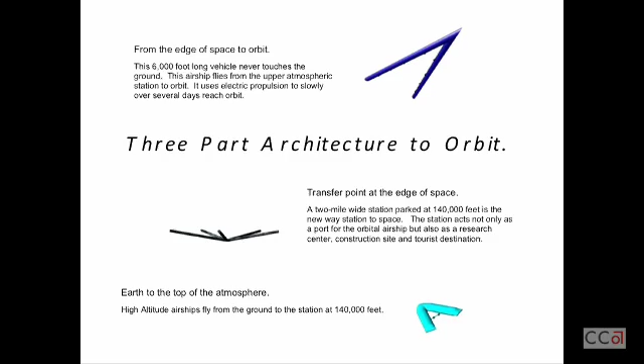When we first started this, we identified about 11 completely impossible things about why this won't work. That didn't bother us, because 35 years ago we didn't know any better. There's only about 3 impossible things left. Now that we know better, those last 3 don't really bother us so much, because we got around the others. We think we can get around the next 3.

Now this is the video that I think doesn't work. This is how I get you to space, but I can't program a VCR. Yep, that one won't work.

But this isn't just an imagined thing. It's not just conception drawings. These are things we've actually been building and flying at nearly 200 test flights, again, for about 35 years.

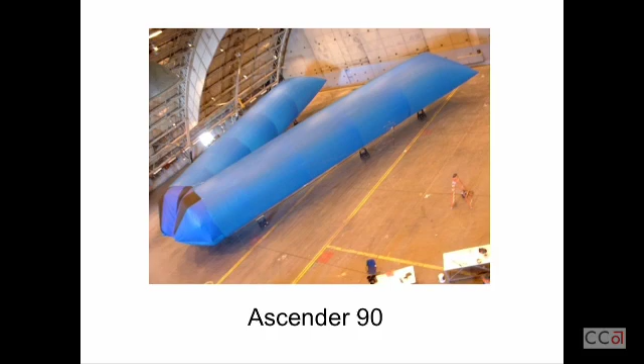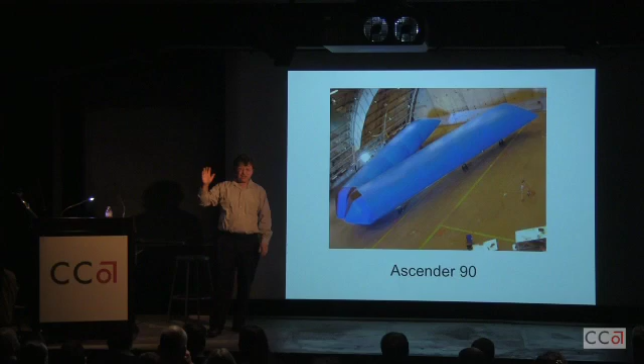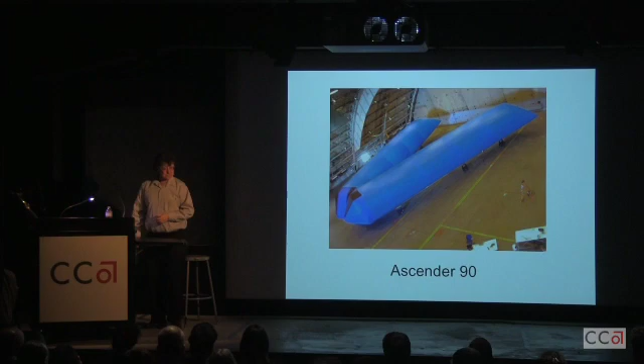Everyone's heard of those V-shaped UFOs that people see. You know, they report all kinds of UFOs. There's actually 4 separate websites devoted to JP Aerospace convinced we're aliens. A few times our vehicles have been spotted, blurry pictures taken by hunters, and it makes it into the papers. Those V-shaped aliens? I kid you not, it's all us. We'll send in pictures of us in the hangar, standing next to it, going, hi, trying not to look like aliens. The papers won't print it. The alien story is a better story. But actually that's okay, because I do a lot of alien talk radio, and they buy more hats and t-shirts than any of the space people do. Essentially, they're a little not quite all there, but they're really nice people.

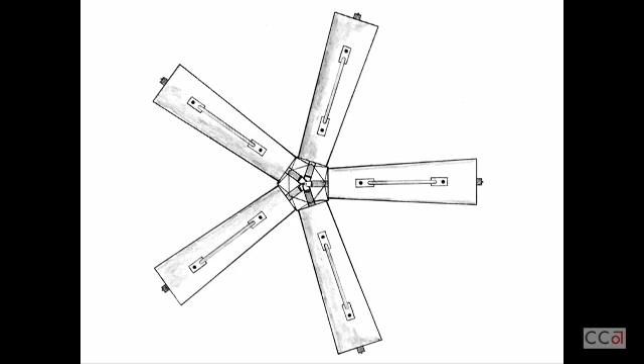This is kind of a view of the big Endgame. This is a 2-mile-across vehicle. Now, that may sound gigantic, but really inflated structures, you can do a lot more with size. It's not like a bridge where it's a very complex, difficult thing. Most of this is hollow and inflated like a hot air balloon.

To get that to work, for the folks more technical, you have to basically eliminate the drag. So we have forward drag reduction systems, kind of an advanced concept. And then you have hybrid electrochemical engines in the back that actually produce electricity while they're thrusting out. These are all very exotic technologies, but they're all technologies that we've actually done. We've actually fired our engines - we're on our 82nd test firing of them, and we're doing our next flight firing of them at 100,000 feet this summer.

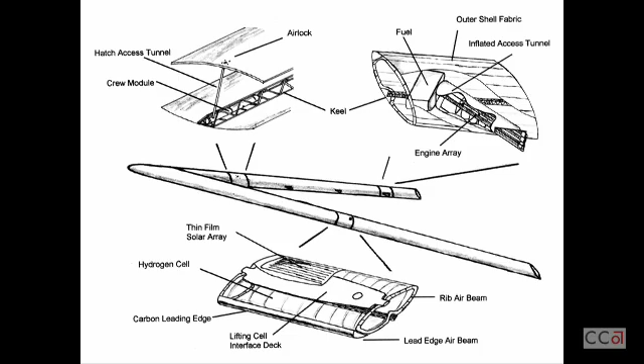Is this Air Force funded, or how is this funded? Actually, I get that at the end. We're all privately funded. We did sell one to the Air Force, and we paid the rent for 2 years with that, which is great. But we actually don't do that very often.

So was this one carbon fiber? Yeah, all the poles are carbon fiber. The small poles we buy, the large ones we do all our own molding. And then there's these aluminum tab connectors. So you'll see in a lot of our other vehicles, they're all made out of carbon poles, because this gets torn apart when we're done flying the airship, and then it gets made into a dozen other smaller vehicles, and those get torn apart and get made into an airship again. They're kind of our tinker toys.

So for the flights coming up in April, a lot of the equipment is flown 24 times on two dozen different vehicles in different ways as we just build up new things. And because we're not a big funded program, after each flight, everything's got to get torn down because all the parts get built up into the next flying contraption.

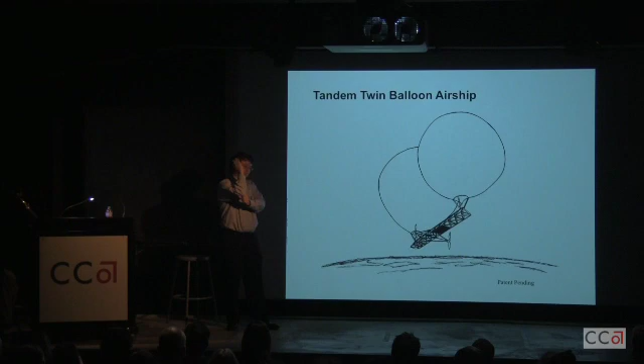Because we have this, the tandem, you get a feel for how big it is. See the propellers there and the balloon holding it up. Again, it's kind of two balloons on a stick. But it actually did the same thing as the big, giant, 300-foot long thing that looks like a Goodyear blimp does. Carries the same payload, flies a little faster, but it's so cheap it's almost disposable.

These balloons start out about 14 feet across, but they get to about 60 feet across. So at altitude, the balloon will be contacting from here to here. And the way this works is, as it's going up, the air flows around the balloons, creates a low pressure zone underneath. You get the distance right, the low pressure zones combine, and it locks the balloon in place. You ever seen, at Sears, they put the beach ball in front of a vacuum cleaner, and the beach ball would kind of stay right in place there? It's the exact same thing on a giant scale.

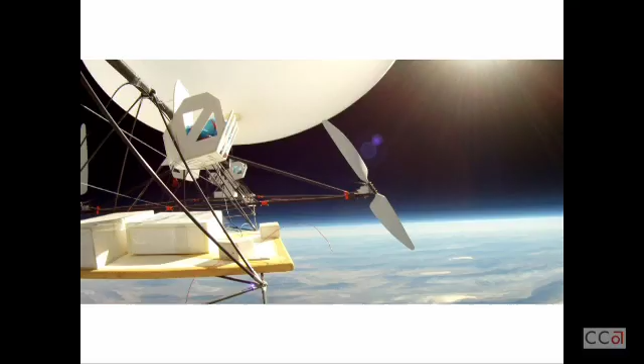And that's a view from up top. That's sitting at 95,000 feet. See, the balloon's gotten pretty big there.

And we set the world altitude record for airships with this one. The previous one was from the Army program. They only spent $100 million on theirs, and they flew about 6 miles lower than this. They got to that altitude, and their balloon ruptured, and they lost the entire vehicle. They don't know what happened to it - it just vanished, it was gone. We actually got ours back in the shop. We've taken it apart, and it's going into the new Ascender 90 vehicle.

And that's a view looking up the truss of the balloon. You see the high altitude propellers, the whole truss structure, video antenna. These are our parachute baskets.

At the peak altitude, when we're all done with the mission - we flew up, did some turns, got everything good - then we released the balloons. Actually, one balloon got up to peak altitude, and we pushed it higher and higher, and it finally popped, so we released the back balloon.

And then the parachutes - these are like kid baskets in front of their tricycles. When you're in a vacuum up there, if you put out the parachute too soon, it just falls and tangles up with stuff. You put it out too late, you fall supersonically, and it just rips off.

The mission control guys - we have an old converted news van that operates our mission control. Some guys are really good at it. They'll be looking at the pressure, looking at the data, looking at the descent rate to put that parachute out right at the right time. A moment late, it tears off. A moment too soon, it just falls and tangles.

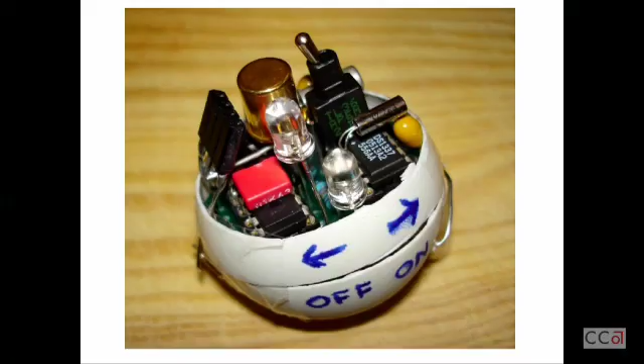This is one from Sweden. There's 2 computers, a data logger, and 17 onboard experiments. It's a full atmospheric lab. And this is a real ping pong ball. About 1 in 5 are like this, very sophisticated, doing a lot of real science.

Sometimes they put just a marshmallow. That's actually my favorite. You put a mini marshmallow in, say you're in kindergarten, it puffs up in the vacuum and freeze dries. And it's a great science fair experiment.

I had a bunch of 5-year-olds, 6-year-olds, first graders. And they were local, so I took the ping pong balls back, and they flew all gummy bears. The teacher made them do hypotheses and get back what they did with the gummy bears. But I thought, well, it's more of an inspiration thing. You get to see the video of the curve of the earth and the ping pong ball. But it's not really science in flying gummy bears. Well, they taught me a lesson that day.

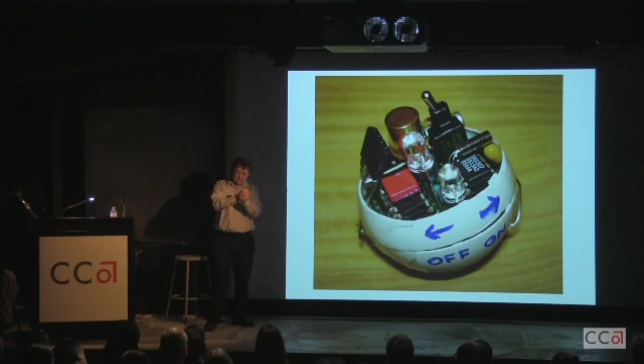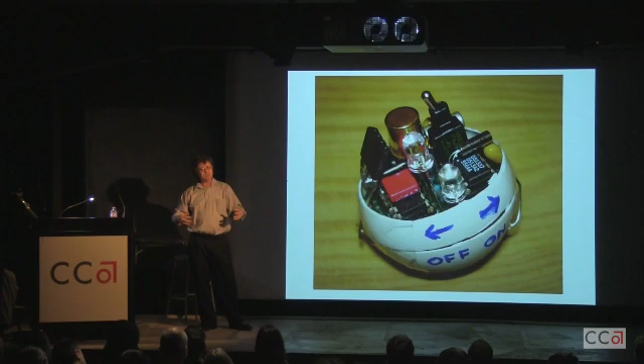A girl in the back raised her hand and says, why is my gummy bear rough? And I told her, well, it's outgassing. When you're in vacuum, particles of trapped gas make their way out. And we ended up having a 45-minute discussion about outgassing, a pretty sophisticated phenomenon with 6-year-olds. And they all got it. I know engineers who work for me that don't have that gut intuitive notion of that phenomenon as all these 6-year-olds have.

Then a cool thing happened about 3 years ago. Oh, there's some PongSats. One of the guys got a thermometer, drilled a hole in it, and put the thermometer through the ping pong ball. So it didn't quite fit in the ping pong ball, but we flew it anyway.

I made a comment on our blog that I love the ping pong balls with racing stripes on. And an amazing thing happened. They all come now with this gorgeous artwork all over the ping pong balls. You get smiley faces, aliens. Had one last year with the entire Harry Potter scene painted out with all the new characters. It's just amazing. There's a smiley face PongSat, but now they all come like this. They're doing science and they're doing art all at the same time.

We don't charge anything for the ping pong balls because we just fly them on research missions. We started flying, our first one we flew 13. I thought, wow, that's a lot of student experiments. That's more than NASA does in 5 years of student experiments. Now we do 1,000 at a time. We're just about to break 10,000 this April, and that's more student experiments flown than all the space programs in the entire world combined ever.

There's some more. This one's from England. He put his little astronaut guy inside. We thought, no, so we got to put him outside just to get the shot.

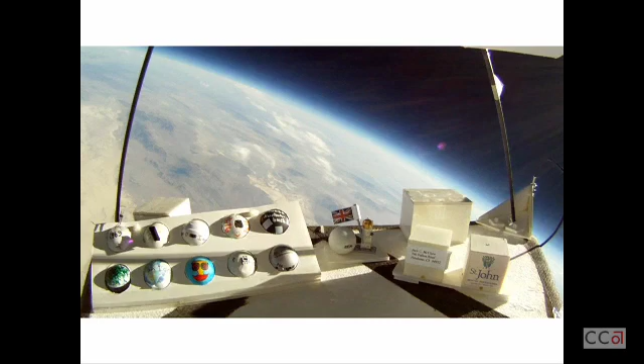We did about 2,000 PongSats from Japan after the tsunami. And they all flew. It was all from the Fukushima area, from the emergency shelters. They built the PongSats and sent them to us, and they all put messages of hope. It was kind of sad because they had messages to their lost loved ones that they flew. After they landed, they get them all back after the mission with a DVD showing the onboard video, data sheets, how high, how fast, and the certificate that they flew.

And they actually planted this big orchard, or field around the city there with the sunflowers that had flown. This is a sunflower that flew, from a seed that had flown on one of the PongSat missions. And that's what we want to happen to our millions of PongSats.

Every time I'm reading the book of John, I think, either he read my mind or I read his, it's kind of mixed up, but it's an endless source of inspiration for me, as it is for many others around. I have to talk only 10 or 15 minutes, that was a big trick, but we'll go through it. I'll try to establish a conversation with some of the things John was doing in this project.

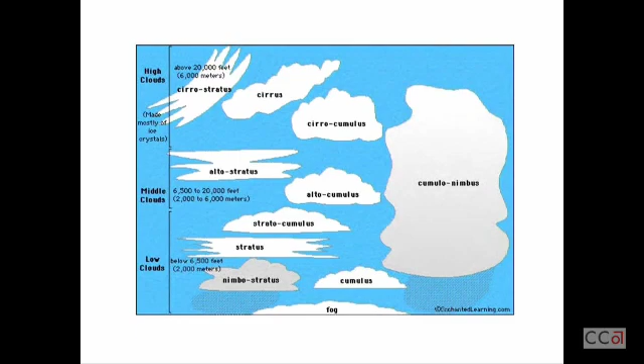Now I'm doing a residency at MIT, working with somebody who is doing this kind of cloud chamber - not exactly, but they build a chamber where they put fluids to understand how the atmosphere relates to experiments on the ground, studying what happens with currents up there. And I asked, out of curiosity, what if it happened - what if a future city were like clouds, and each of them were...

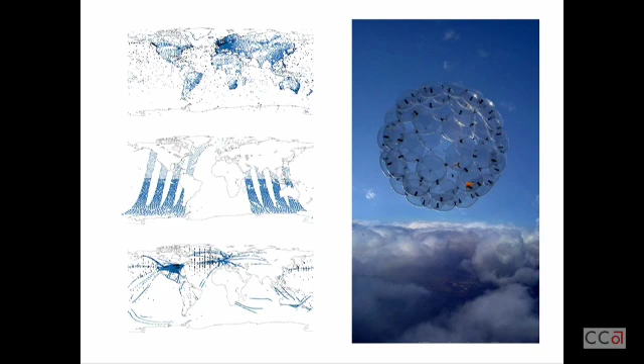Let me show some of the images. Let me show something like this, no? Each of these - this is a collage, this isn't real, I'll explain the distinction between when something is real or not - but you know, what shape might a future flying city get, which might be like an aggregation where each of these spheres you can think of as a house, and they combine with each other. But if you don't have a net to hold each of these spheres together, what shape might future flying cloud cities get?

It might resemble what we see today as the clouds. We started to do a kind of small experiment with a big tank which spins all the time, kind of like the rotation of the Earth, and then we put some liquid in, like a chemistry department, with a neutral buoyancy particle. But they were running only 1 or 2 particles. I said, what about if you put like 1,000 of these particles in? She got interested to understand how the shape of this agglomeration of a future cloud city might resemble, which got me enthusiastic about this idea.

There are a few things I'll go back and forth on. Some will be more technical, some not, I'll explain later. But many of the things, when we look at it, it's this kind of basic modular construction, an aggregation of things, and it's very simple to build. This is what I think, so I share pretty much with John, it's like hands-on, try to do the things.

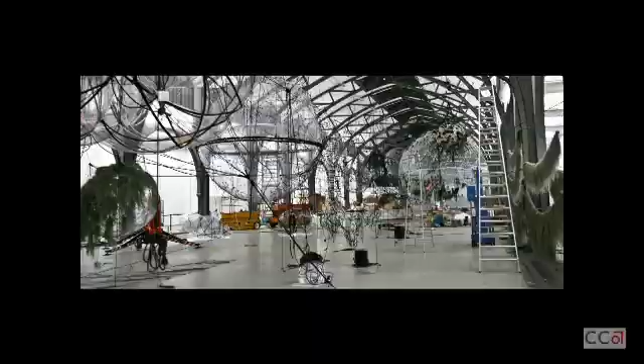This is what we worked on at Berkeley with Elizabeth Thomas, I'm here, and this was part of the things. Many of the plants inside are from the family Bromeliaceae, like Tillandsia, which are plants that live completely from the air. This means they're a good candidate for future flying gardens. It's the same family as the ananas.

This is another thing which I think would be interesting for John. It's a kind of foil, a Japanese foil produced by Toray, which is getting complicated to produce in a bigger sheet, but so far I think it's the better foil for keeping a balloon, much better than Mylar. You can step on one of these balloons, 2 persons, it will not pop. It's free of wrinkles and will last very long.

This means one of the things I said with John: why don't we try to send this balloon up there and see how they might react. And then, with some of these spheres, we can start to send gardens and hopefully in the future people there too.

Let me put it this way, this was back to a collage from 2001 when I was a student at the Städelschule. All the time when I moved from Argentina to Berlin, something I was missing was the bad weather, the cloudy days. I think I shared this when I was in St. Petersburg. Usually in Argentina, when the plane is landing, people used to clap because it was successful. But in St. Petersburg I was there for 3 weeks and there was no sign of sun, just cloudy.

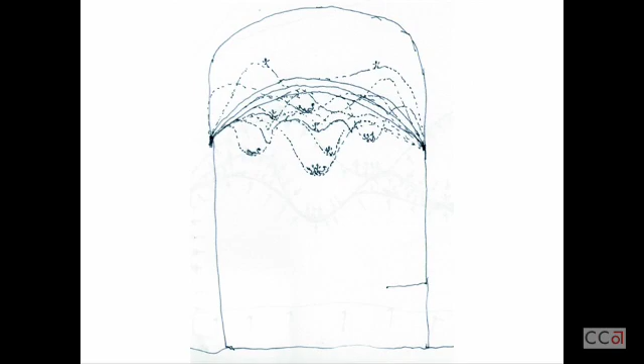For me, it's pretty much like a science fiction movie, because when there's a lot of pressure, all three foils are together. Does it mean there's no space? No, all three are together. Then you enter with your body, and you push the foil down there, and then you open the space. While you move into the space, it follows you. It's pretty economic somehow.

There's this drawing by Paul Davies of how this kind of parallel universe might form, which is more cosmological. I was with Alan Guth at MIT also, talking a little bit. And the other thing is that's a model I did also in 2001.

Nobody will believe that this will be possible. And then when I see this picture, I say, well, that's something which made me happy somehow to see still. And let me get, well, it's just regular PVC, yeah.

The material is not so special, but what we did a lot is tests - stretching, how many people, and here and there. And the other thing is, we'll show you some slides later, but we wanted to make it fly. This means filling up one of the chambers with hydrogen, and turning it into a kind of floating island. The other thing is, very simply, the theory of Einstein's relativity - depending on the mass of the body, it might bend space and time.

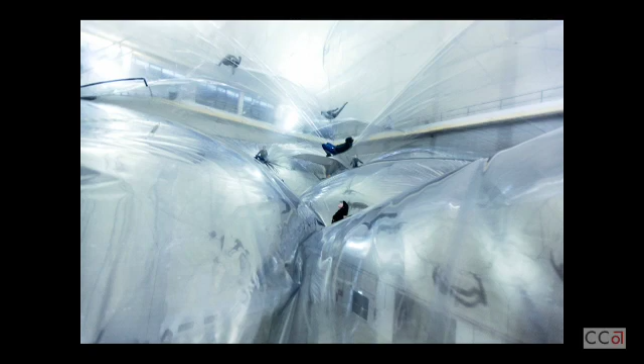And this is what really pretty much happened. When 3 or 4 people are at the same point, it gets very, very difficult to escape from it because you bend it really, really much, and that's why the instructions are getting up there. People say don't get together so close to each other, because you might not escape this kind of black social hole. Something like this.

But what I like is, yeah, well, there are many, it's sometimes getting very, very wild. It's also pretty much unpredictable because sometimes the pressure is pretty high. Does it mean it gets much more stable the way how you move?

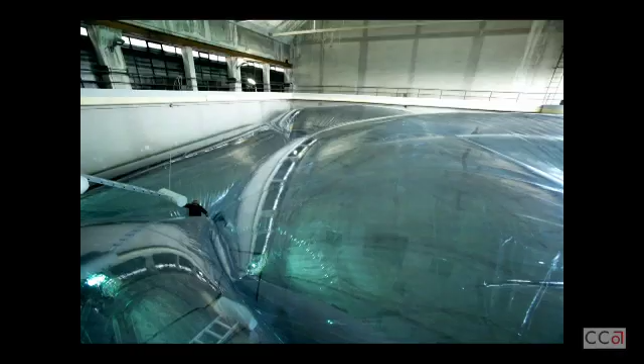Here you don't see so much the people down, but don't forget you're like 60 meters high, depending on the pressure that you have at each level. Here you get down. Here people from down, here from the top. For example, this guy is getting in trouble trying to go out - you see, he cannot escape. We were struggling a lot because he had to wait for 2 or 3 people to go to the back of the room, and then he can get high enough and get out. It's a little bit complicated.

It's like going back to the idea John was talking about, this 3-stage architecture. There's one thing, very simple: you have a normal helium balloon, not with Mylar, and you put it underwater, it gets small, you release it and it grows, as John was showing.

Now there's one thing in an airship called the ballonet. You don't want to lose helium, so when you go up and down, it will be a kind of architecture or space which depends on the level where the airship is. You have all the time this chamber that shrinks, gets small, then gets big, depending on the altitude.

If you think of this ballonet inside an airship, naturally you might have an auditorium or a place to walk that's very stiff because the pressure is very high, to something completely low. It means it's something depending on the altitude where you're standing. The space might also change based on that.

This was at the beginning. We were always afraid that this would close up on top of you and you wouldn't be able to breathe, but at the end it worked.

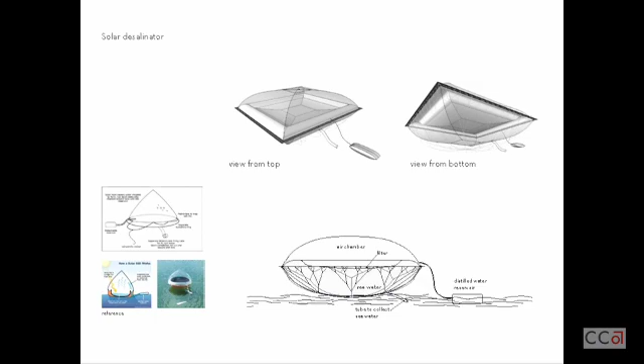At MIT we started speculating - there's this solar desalinator that sailing boats usually have, and the same piece was built with the idea that later we might put it outside. We thought it would be interesting to make a video performance on the Maldives island - they said in 15, 20 years it will disappear - and we started building the same dimension, the same piece that's in Italy, just changing the context. You can widen a little the relationship it could establish, but you can drink water, desalinize the water, and so forth.

Yeah, these are just like with some friends.

Maybe, for 10 or 12 years I wasn't really invited into architectural school - I was much more into the art scene, let's say, and still today. But I don't know what happened - suddenly now the architects are getting interesting. I don't know what happened, but anyway, it's interesting.

One of the things is you can think of these spheres I'm trying to build as a 3-dimensional wheel of a bicycle. The hub in the middle is the one where all the tensors get to. The spaces are getting close also in between them, and depending on the tension you put on all the spokes, which go 360 degrees, you get a very rigid structure.

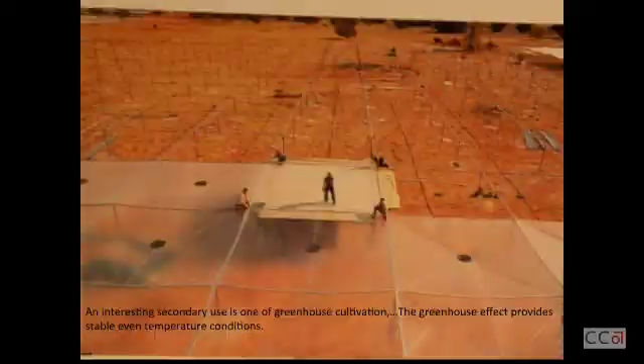The other way is how you can also collect water. This is a barrel they use in the desert of Atacama, and in 12 days they collect 200 liters of water just through the change of condensation, and it's in the middle of the desert. This means the upper part could also be interesting, to have a kind of sail where you could fish water from the clouds and bring it down. Something maybe John and I can start to work out.

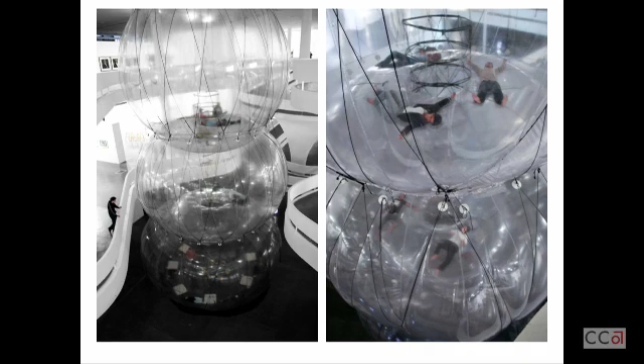This is a little bit more complicated. It's always these pressurized spaces. You can imagine when somebody forgets the door open down, you could hear from the shore, close the door, because everything collapses, right? It's like that, and getting squeezed there is a little bit more complicated.

But I thought I would have it, the solar thing I wanted to show you, that I left there. Anyway, we will go back. I put the images together, but part of this is a thing which was at the Met.

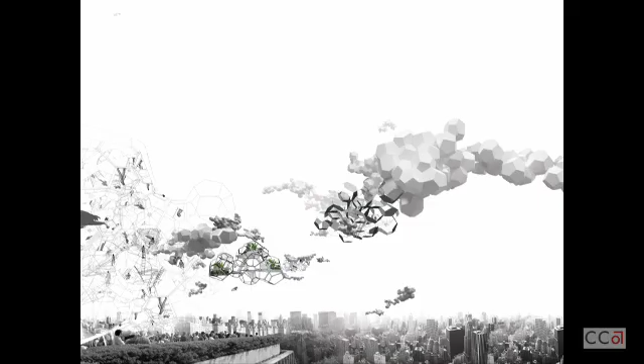This is called the Weaire-Phelan geometry. Maybe something interesting also for John, because there are these two physicists from Dublin who have written 'The Pursuit of Perfect Packing.' I thought this is a great thing. This is kind of the Weaire-Phelan geometry, which somehow is the maximum volume and the least surface of how to put spheres together in a kind of limited space.

Does it mean the densest? It could get a little bit more, it's the more efficient, you know, based on, and there is nobody who can still beat this relationship.

What is very important, when you use lighter-than-air vehicles, which is what John and I are doing, the difference from heavier-than-air vehicles: lighter-than-air is a vehicle which flies with a gas that is lighter than air, somehow. I don't know if it's too technical, John, if we'll be able to follow, or should I insist on some points, but otherwise just tell me if something is getting wrong.

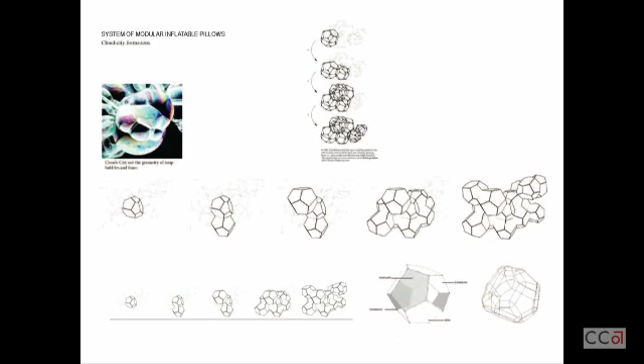But anyway, I've been building this kind of configuration, because it's very important to have a lot of volume and little surface, and the sphere is the best relationship we can give. Now, when you start to put many spheres together, let's say each of these spheres is 1,000 feet or 300 meters, how can they aggregate to each other, and how, from a single individual house or a city, they can be combined to each other.

And then also if Don Pettit, one of my favorite astronauts on top of the International Space Station, might be seeing the reflection, and at what time the orbit might coincide, that we might be able to see him, and he sees us and we see him through the reflection of the thing. And then we started to work here. We wrote to Don Pettit, but we didn't get an answer yet. I think he got down.

Yeah, I mean, and then again, it's like the position of the mirror kind of starts to respond to different kinds of sensibility.

I like also, you see this, and you see again the Bolivia image, the Uyuni, trying to put the skies down where it happens sometimes. That is some of the images where Central Park is up, and there's more a capability of trying to perceive many images at the same time, and how through this kind of new environment you are able or capable to move through these.

And the other thing is, I'm kind of forcing myself to talk more about architecture, but I don't know if you want this.

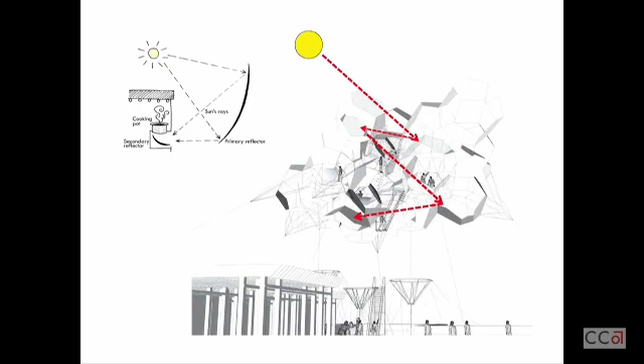If you have a huge city down there, it might always be under the shadow. With a laser, we're playing with how the sun might reach the lower part. Here we're cooking a chicken in a solar balloon, so you can do this kind of solar cooking.

To go back to the idea of a solar balloon, this is a bit different from what John was doing. He was using hydrogen and helium to lift things up. There's another way where you can fly only with solar energy, where the balloon goes up only with the temperature difference produced by the sun.

Funny enough, when I was at NASA Ames with all these guys who put people on the moon, I said, look, for $300, 2 people, a weekend, you can put a man into the air. And I could not believe it. It's like there's this trade of technology somehow.

There's something very, very simple. This type of balloon that can put a man in the air is just a regular polyethylene plastic bag, taped with scotch tape and nothing else, with a small bike ring. I think there are only 7 or 8 of these ever built since we've been on planet Earth that can lift a man in the air. They're very little, and it's a very small community.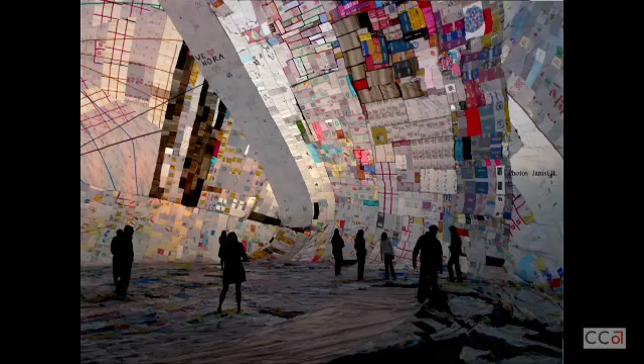Then came this project, a little bit like John's Pong set, but what we tried to do - I think it's in Colombia - Hugo Santamaria called it and named it Museo Aerosolar. This means a kind of flying museum, which you can get inside, and it flies too, with the sun only. There's nothing, no hydrogen, no helium.

You have to fly very early in the morning. There's no real scale to it, and that's something I'd love to explore - how to slow down the scale. This is a perfect example of how I'd love to build a flying city, crowdsourcing it: people donate plastic bags, they come for the week and tape it together, they see it flying. It's reusing material with so many properties, which for me is unbelievable.

Many people started doing it by themselves - there's a group in Helsinki who saw the instructions and started on their own, another group in Cuba, another in Germany, and everyone starts doing it their own way. Sometimes we meet each other and tape it together, and it keeps growing. I'm always thinking about how we can scale this down to build something together - like, being in Silicon Valley, how do we turn from cloud computing to cloud citizenship, and try to close that gap.

If we learn so much also on the way - I don't want to get too much into politics, but my family was forced to live outside Argentina during the military dictatorship for 11 years. They were allowed to come back when I was 11. I got married to a Serbian, my wife, and then she could not be in Europe. There's a lot of things going on, beside also how badly the distribution of land, with limited resources, has been done with a certain mindset.

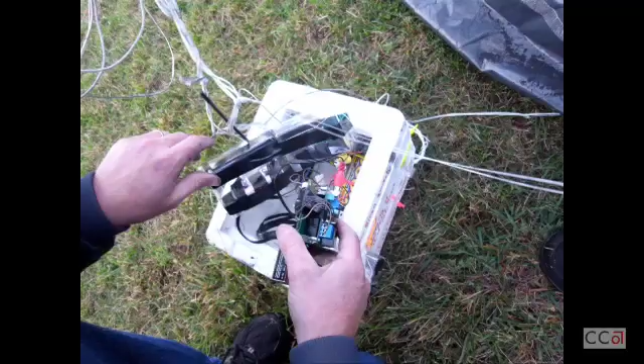Well, here we are trying to bring down the balloon. This is something I'm looking to start doing with John. I don't know if I will go through this project, but very quickly, there was a proposal for a competition.

This was an architecture competition, 2000 or 1999, to build a mobile clinic to prevent HIV in Africa. My father worked for the World Bank for many years, and for holidays I would visit him in Cabo Verde, Colombia, or Guatemala. What always happened was a kind of lack of knowledge about what's going on there - you can imagine the European Union arriving, and for the people it's a taboo. They don't even talk about sex.

But anyway, the commission comes, they meet up in the square, and people run off because they don't even talk about sex, and you're going to teach them how to put on a condom - it's an unbelievable thing. So I said, why don't we do a flying condom?

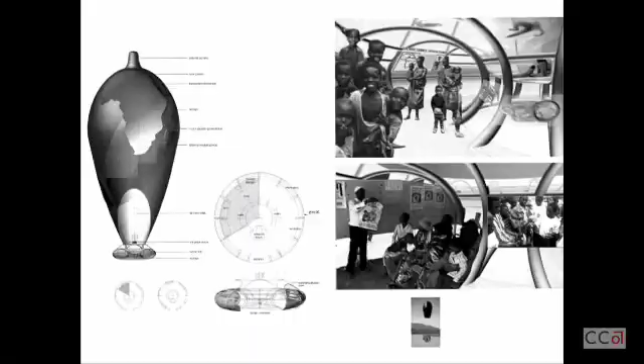Very simple - imagine people in a small truck saying, today we'll talk about prevention, and nobody comes to the square, nobody wants to talk. But imagine this huge flying condom coming from the air, reaching the village - everybody says, what the hell is this? And they come to the square where they start to talk. You already generate a kind of synergy which somehow lets you start talking about something else, and then, by the way, you can talk about prevention.

I think the first collage I was doing also used part of Ant Farm's work. Curtis isn't here, I didn't manage to send it to him, but they're fantastic.

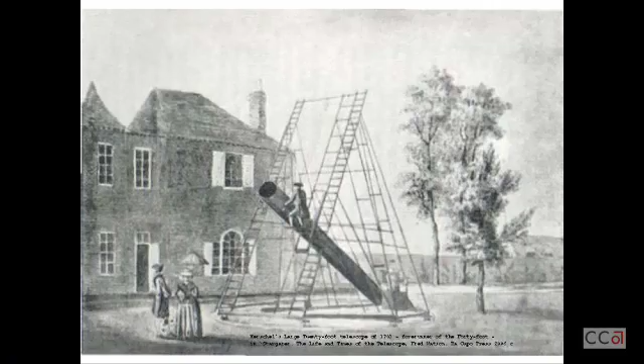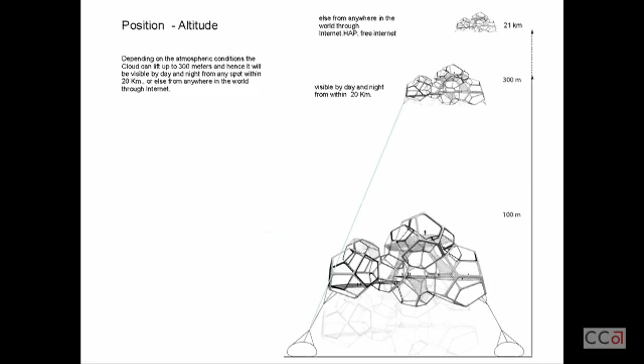This might be a little old now, but there's big capability with HAPs - high altitude platforms - for distributing network communication. John Powell is here too with some of his things. I'm kind of trying to put all the things together.

Maybe I'll go quickly through the last project, which is a bit different, or I'll stop here - what do you think? I'll go through this, even though it might break the flow a little, at least to understand this on another scale, maybe.

Going back to Buckminster Fuller, he said we're living on a spaceship Earth which spins around the sun. This idea of constructing a cloud city is also about how you frame it - you can always talk about galactic clouds and so on. The idea of clouds could enlarge to another dimension.

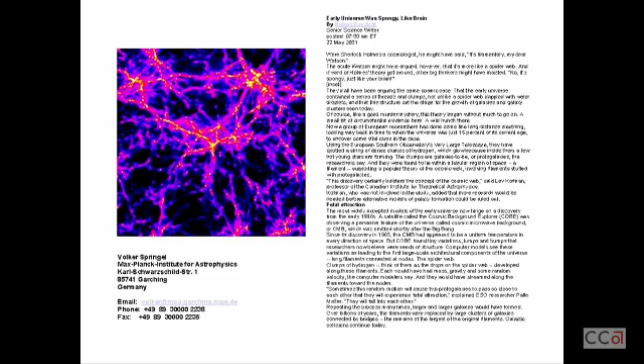In this case, there's a guy, Volker Springel, we visited him at the Max Planck Institute, and what they do is the best simulation of the origin of the universe, called the Millennium Simulation. They got many scientists together, and they always call this the cosmic web - how the universe formed, the most precise simulation, and they keep updating it. It's something very precise.

Now, the best analogy that most of them have found all the time to try to explain the geometry of this universe is always related to a spider web, a three-dimensional spider web. Every time you find an article, it says, like, a three-dimensional spider, or drops of water caught in a three-dimensional spider web.

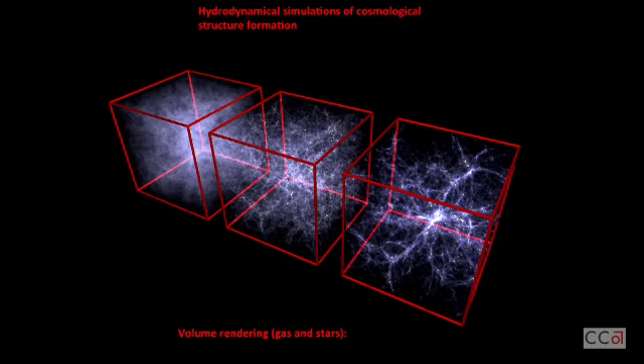And I say, well, then I got invited to the Venice Biennale in 2009, let me put it that way. Oh, it's a bit mixed up, the things. And then I said, well, why don't we put a spider inside a box? She might weave a web, we take out the spider, otherwise we'll vibrate the web too much, and then we scan it, and somehow this will give us some sense of how this geometrical universe might have been.

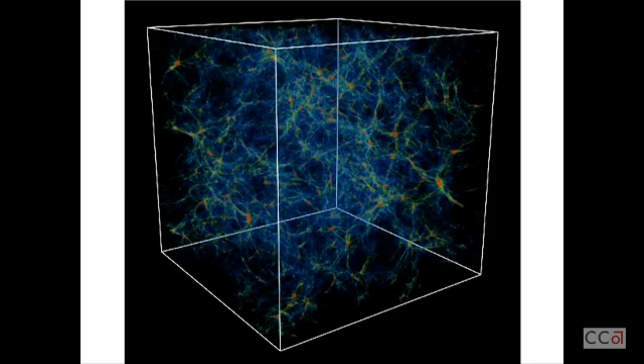Now, when you talk with an astrophysicist, with arachnologists, they say, well, this is bullshit, because the spider web has nothing to do with the cosmic web, and then it goes back and forth. But what we find out is, let me go through, well, this is Samuel Zschokke, the person who is, till now, they always have...

We'll go a little bit too quickly. Well, there we are. We are getting the Black Widow. There is a black market because it's not allowed to ship them. Anyway, you can buy them. You don't have to ask them to ship it through the weekend because otherwise they will get it stuck in customs and here and there. Anyway, there we are.

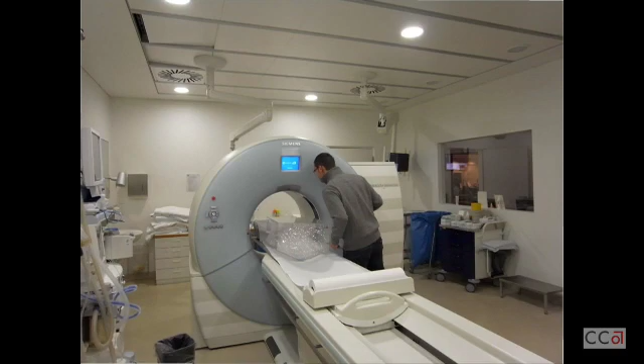And then we put the Black Widow inside a box. Then she started to make the spinning of the web. And then we tried to scan it using many different methods. We went to the hospital. They gave us 3 hours of time. Anyway, and then we started to talk with a lot of people about how we might be able to read these lines.

Now, this CT has a certain resolution. We're training with soap bubbles, but it's 0.6 of a millimeter. This is half a millimeter, and the thickness of a spider web is 1,000 times thinner. Does it mean there is a micro CT scan? But to understand the geometry of a web, which has this kind of dimension, we started to talk with a lot of university laboratories here and there, and nobody had even a technique to scan this web.

This means the story gets more interesting, because all the astrophysicists explain this geometry through a 3-dimensional spider web, but nobody on Earth had even scanned a 3-dimensional spider web. This means all this comparison all the time, oh, this is similar to that one, is at the same time based on something which is kind of a myth also.

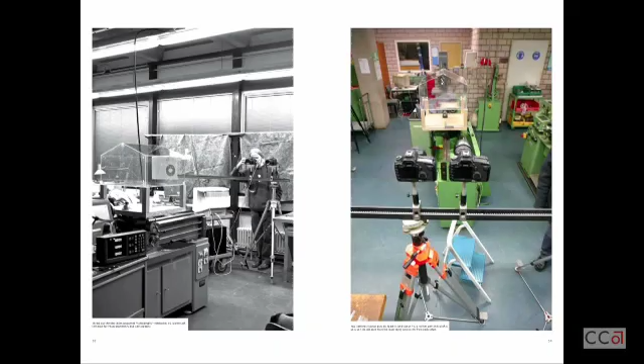You know, the same as what the universe is - we know only 4% of what we are. There is this dark matter, that represents 96%. We don't even have a name to put on it. This means something which is very close to our house, in every corner, is less studied than the universe we know.

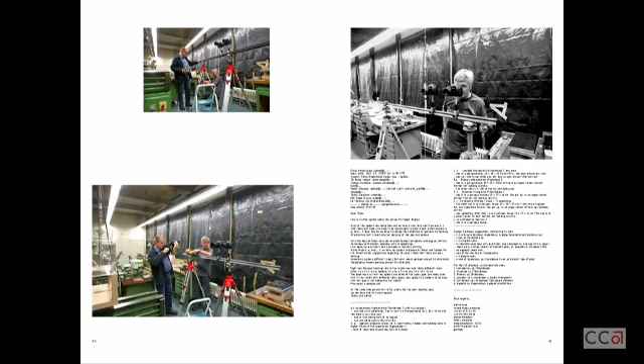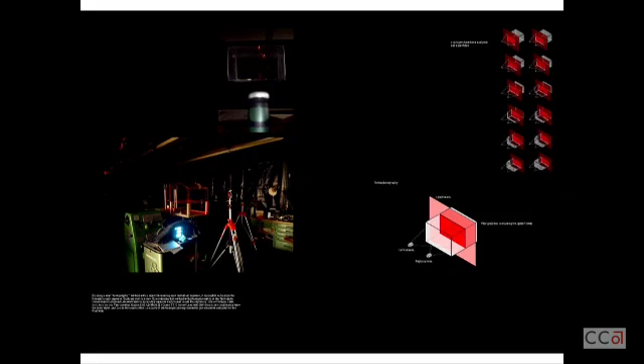Anyway, then we went to the Technical University in Darmstadt, to the Institute of Photogrammetry. I proposed that we illuminate the web with a laser, and then run all the sections. Very simple: there is a laser, and you can see exactly the intersection of the laser with the web. Then we put all these parts together. Here are all the small segments of it. Then we started to build it digitally.

This took us, I think, about 4 architects, 2 months working on it. We tried to run a script to follow the trajectories and see the nodes, because we had to correct it - we didn't scan exactly every millimeter, every 3 millimeters, there was no way to do it. This is something I'm trying to look forward to working on with people at MIT, to optimize it. It'll be maybe the method.

And the other nice thing also, before I forget, let me show you a little bit of the construction now, and how we turned it into 3D also. One thing - maybe we've got time to get into more sociological meaning of Latour's thinking - but when you pull one of these threads, this node is connected, it bifurcates into 2, then it bifurcates into 3, then 4, and so on. This means the tension you have to pull on this thread to keep the node in place in space shows how they are building.

We were thinking, okay, we build it in rapid prototype and things like that, but it's huge—1 to 72 scale we wanted to build it. What we did is put all these lines, then we have all these points in space, and then we start to build it.

Then we start to stretch. Every time you stretch one of these lines, you see exactly if this node touches the line, because you have a vertical nylon line. This means we can keep very precise in space every connection between the things. Oh, it is a kind of a nightmare.